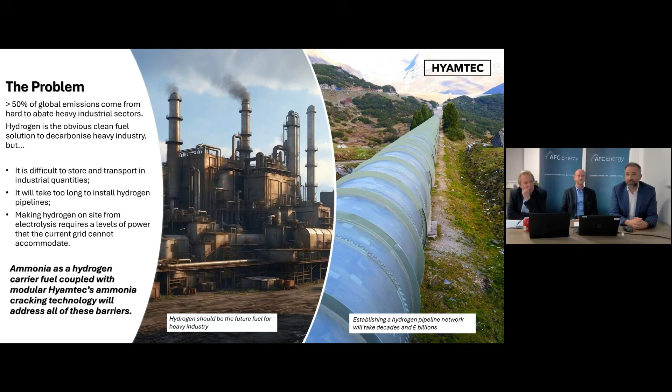So with that in mind, and the complexities of putting a hydrogen network around, we've started to look at how easy would it be to convert our ammonia cracking technologies to generate hydrogen on demand in a containerized solution that could be deployed quickly and readily, because we think liberating hydrogen from ammonia using our cracking technology is a potential way forward for these industrial sectors to move quickly. We want them to accelerate, adopt hydrogen as fast as possible to start addressing these emissions targets.

So looking at our ammonia cracking tech in a little bit more detail, and for the investors and shareholders that have come to our AGMs in the past, I've had some of our cracking systems available for people to see. But our expertise is we have a modular device, and the benefits of a modular device means it's highly scalable. Rather than these very large petrochemical sized plants, we can make something that's small. So for instance, our current reactor is probably about the size of a fire extinguisher. We can then bank a number of these fire extinguisher sized crackers together to get a much higher throughput of hydrogen or delivered hydrogen, because we designed it from the beginning to be highly scalable and that modular.

It also works over a very wide pressure range. And this is some of the key bits of our technology over other people's, which means we can integrate it with lots of other things, be it fuel cell systems, be it purification technologies, or other plant and equipment. It already runs at a high pressure, so you don't need to compress the hydrogen that you're making. But it all does that in a really compact, small size. Again, our reactor is about the size of a fire extinguisher.

It's highly efficient. We've published some numbers, and I'm looking to publish more numbers in the future about our operational efficiency, but it's designed right from the beginning to be able to utilize multiple thermal heat sources. And I'll come back to why that's important in a minute. We've now been filing quite a lot of IP on this. We've been working on this on and off for nearly 12 years, but we've filed a number of patents recently, and we're making some really good progress in that sort of space.

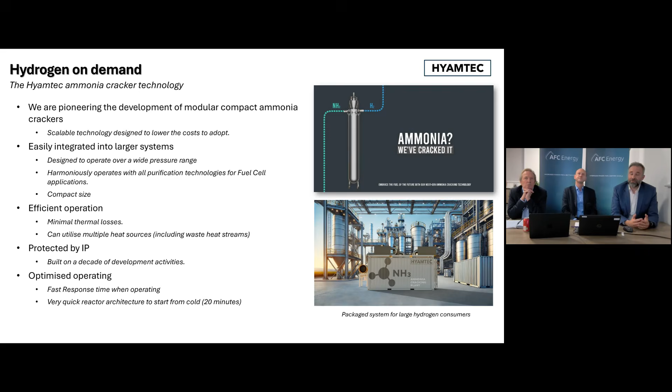And the other beauty is because we've designed our system from the very beginning to work in combination with fuel cells, we have to have a system that's very fast, very dynamic, and very good response time. We can start our reactors from room temperature up to full operation within 20 minutes. And that, compared to other crackers that I have seen, has taken numerous hours. So for us, that's quite a big selling point because, again, it means we can simulate pipeline activities.

Some of our achievements. I put this slide together just to sort of show that we've been doing an awful lot in the background. So we've connected fuel cells, the AFC Energy fuel cells led by David Harvey, with our crackers in the past. We've actually charged electric vehicles using that system from ammonia. So we've gone from ammonia to hydrogen, pure hydrogen, by the way, to electrical power to motion in a car. We've also built what we believe is the UK's largest pure hydrogen pilot plant, and we have got certifications of our hydrogen gas quality from that.

We show that we're better than the most stringent requirements for ammonia in the hydrogen gas stream. We've scrubbed it all out, all as part of our efficient system. We meet the grade D, and we can process around 2.5 tons a day ammonia throughput. Just on that point, that system will generate the same amount of hydrogen as a 1 megawatt electrolyzer. We've got YouTube videos around that you can look at in more detail.

If you think a 1 megawatt electrolyzer obviously requires 1 megawatt's worth of electrical power, our plant to do the same job requires 6 kilowatts worth of electrical power. So 0.6% of the power to generate the same amount of hydrogen. So you don't need a very large electrical backbone or grid connection for this to operate, because the energy is already in the content of the ammonia in the first place. We are just liberating it and making it available for other uses. So it means the rollout or the deployment of pure hydrogen plant based on our technology is actually relatively straightforward.

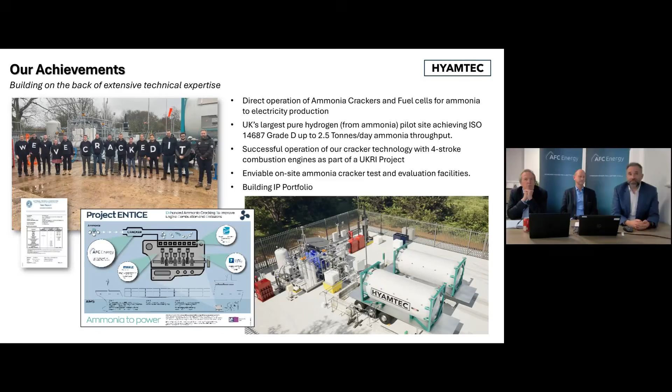Looking at the future, the left-hand box, we've got the core reactor. This unit is where we've been focusing the bulk of our time up to now. We're pretty much completed on the design, and we're working quite thoroughly on the manufacturing aspects of that unit, because one of the key things for us to be successful in the future is not have you got the best technology, but can you make the units at the right scale, at the right speed, and the right quality. So we're a long way down the road on that as well, and we've been factoring that right from the very beginning. That unit can work on industrial gas provision, it can work on engines, and it can work in combination with purification technologies for fuel cells.

In the coming year, we're looking at linking multiple units together. We've already got a few of them working in parallel, but we want to scale that up significantly. We're looking for a 10 times throughput. So we want to connect a number of these reactors together into a module, which we want to be able to deploy to customer sites in the next financial year. Again, the target for that is our industrial burner customers. But that could then get integrated with purification tech for generating pure hydrogen, leading to a containerized solution where we can generate pure hydrogen for our fuel cell customers. I'll touch on that again towards the end of this presentation.

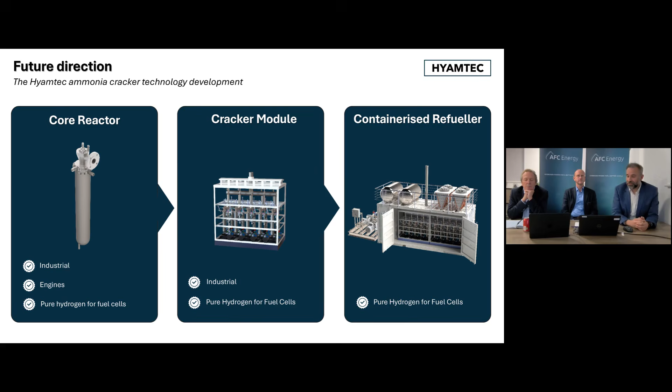So target markets and applications. The thing to draw your attention to is the same ammonia cracker can work in all of these three markets. We don't necessarily have to do much redesign work, and our core IP is valid in all. So the first priority is creating cracked gas, a hydrogen and nitrogen gas mixture. We're splitting the ammonia up to feed into combustion applications for industrial users. So think chemical plants, large scale boilers, heat generation, furnaces, cement manufacturing, steel, etc. These applications are huge consumers of natural gas and they're looking for alternative solutions.

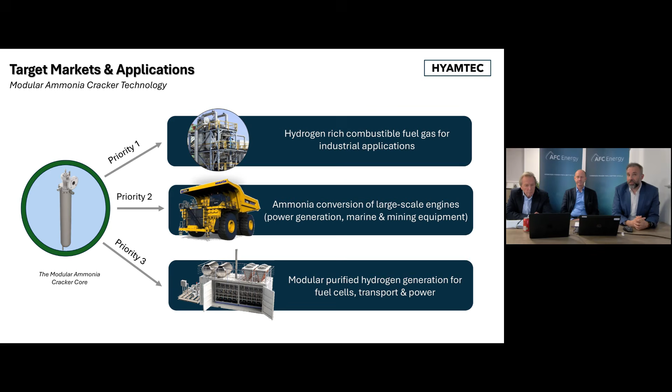And then the final priority, which we'll touch on towards the end, is making ultra pure hydrogen on demand for fuel cells for both transport and power generation. And the reason for splitting this part out into a separate unit rather than having it linked directly with the fuel cell is we can provide the quality hydrogen for any fuel cell customer, any application, be it combustion applications, all the way through to buses, trucks, HGVs, being ready to actually deploy hydrogen refueling stations for the coming decade, where hydrogen fuel cell trucks are going to be making a bit of a difference.

So going into a little bit more detail, touching on the first priority, so looking at the gas grid or the gas networks, where you have factories, again, large chemical plants, for instance, where you are bringing in methane, where you pay a lot of money, not just for the therms of methane, but you're also paying standing charges for pipe works, pipe connections, etc. You've also, if you're a big user, got carbon credits and carbon taxes that you have to start factoring in to your calculations for your economics.

And if you're looking at trying to be slightly off-grid or you're not on a network, you're looking at LPG. All of these systems, when you combust them, will be generating carbon dioxide. So industries are looking at alternatives. They're trying to move to alternatives. Again, first pass, if hydrogen pipelines were available, most people would move to that. But that's probably still decades away before it's integrated and linked to most industries. You could transport hydrogen, but if you think about the logistics and the costs of moving hydrogen around, it's problematic. It can work on small scale systems, but on the very large industrial users, it is a challenge.

Other people are looking at actually doing away with combustion processes completely and moving to electrical power. But again, as we touched on previously, the grid in the UK, and certainly in some parts of Europe, is not there. It doesn't have sufficient capacity or drop size to be able to support huge multi-megawatt arc furnaces that may be required to do a similar sort of job. So all of the three alternative green solutions, they could work, but they do have challenges.

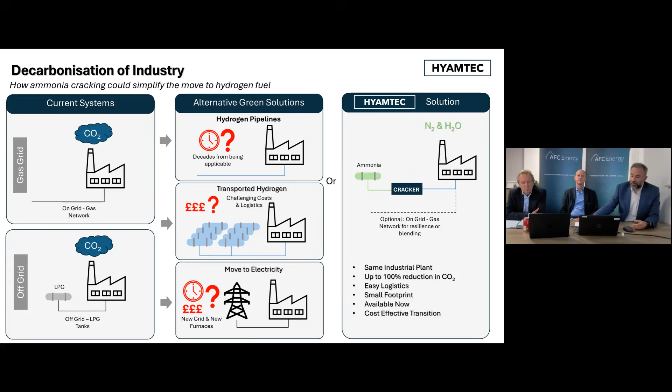Once it's combusted within the engine, you have hot exhaust products. That hot exhaust, which is primarily hot nitrogen and water, due to the design of our cracker, we can extract heat from. We can take a lot of the thermal energy and really boost the efficiency of our ammonia cracker, and we cool down the exhaust pipe. By taking the heat out, we reduce the parasitic energy consumption, which suddenly means that our technology has become quite an interesting solution for these large-scale engines. So our design is highly efficient and it's designed to boost the system efficiency. Now, a lot of people looking at engines using ammonia are actually looking at dual fuel.

So they're looking at diesel or methanol with ammonia. If you've got a dual fuel where you've got a carbon-based fuel to start it, you've still got carbon emissions coming through. But our technology allows for a single inventory because we can make the hydrogen on demand, which acts as that catalyst, that pilot fuel that allows you to burn ammonia readily. And because we've got the nitrogen and we're controlling the temperatures in the combustion chamber, because we're slowing the reaction down due to the presence of the nitrogen, our NOx becomes a lot lower.

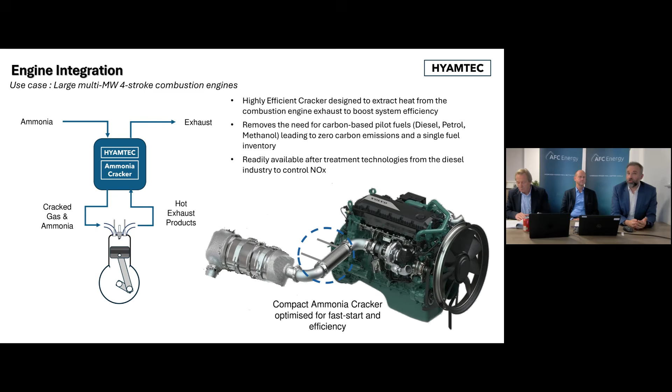That's what a lot of people are interested in, where we're going with this. This project's been quite exciting because we've had a lot of customer engagement looking at whether we can take our technology and integrate it with large-scale engines for trials and demonstrations, to prove that the numbers we're getting at lab scale actually work on a large scale.

Then, to come to the last part, the hydrogen refueling aspect, and again tapping into the construction market and the AFC Energy fuel cell solutions, we can see a hub and spoke type model potentially working with some of the larger construction industries, where you could have a number of the AFC Energy fuel cells dotted around providing power, but you'd have a hydrogen refueler located on the site, generating the hydrogen constantly and filling tanks up, which can then be taken and used to fill all the fuel cell systems. That would necessitate a single supply of ammonia, be it weekly or monthly, just running in the background, providing hydrogen on site cleanly and greenly.

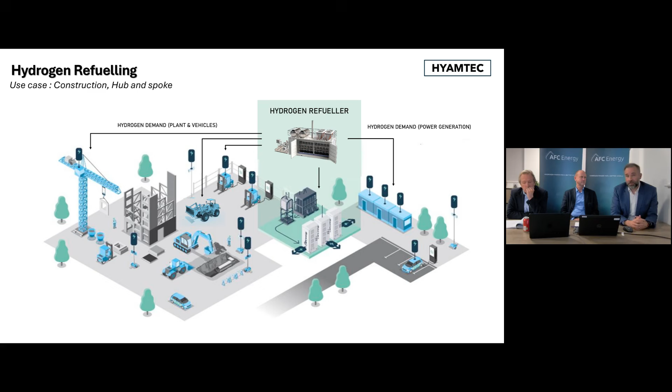So those three applications are the main areas we're chasing as part of the next year, to try deploying and getting customer feedback on that. But the long and short of it is we're intending to make hydrogen happen. We want to stop talking about these things and actually put these technologies out in the field, supporting not only our fuel cells, but also generating more revenues and supporting our investors.